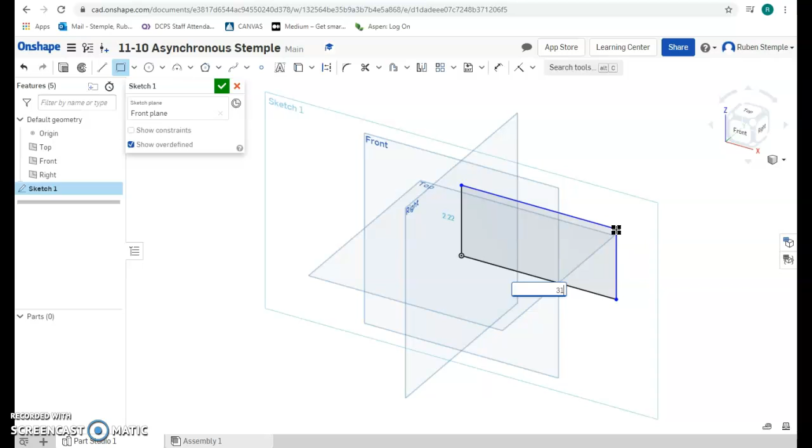I'm going to start that drawing by starting a sketch on the front plane, sketching a rectangle. I'll start it down at the origin, click the button, move up, and make it 3 inches by 1 inch — 3 inches, enter, by 1 inch tall. That was the first section. Click the check mark to stop, and now I have that sketch.

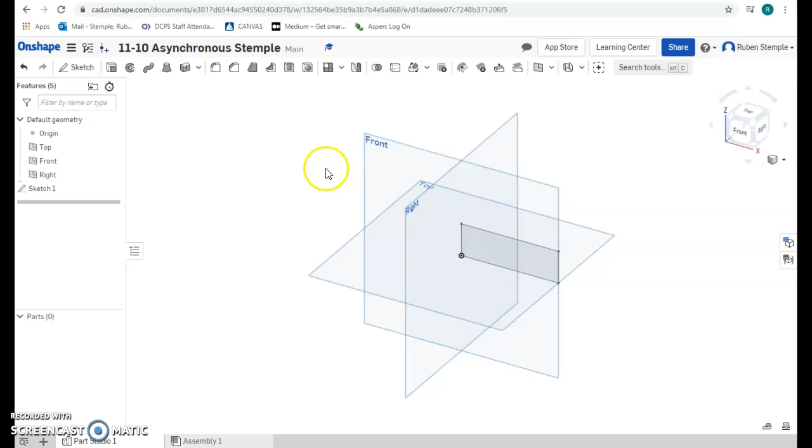I'm going to go back to my presentation to check how deep that should be. The distance back is 1 inch — it looks like a square on this front part, so that's 1 inch back. So I'm going to extrude that by 1 inch. Back to my sketch, click the extrude button, extrude by 1 inch. There we go, now I've got that little square — the first part of my drawing.

Now let's go back to the sketch, because we need to add this little top part here. It's 1.5 inches over and half an inch tall. So I'm going to add that.

I'm going to use an additive process. If you wanted to use a subtractive process, you could have built the whole thing and then subtracted that piece out. It really doesn't make any difference however you decide to do it.

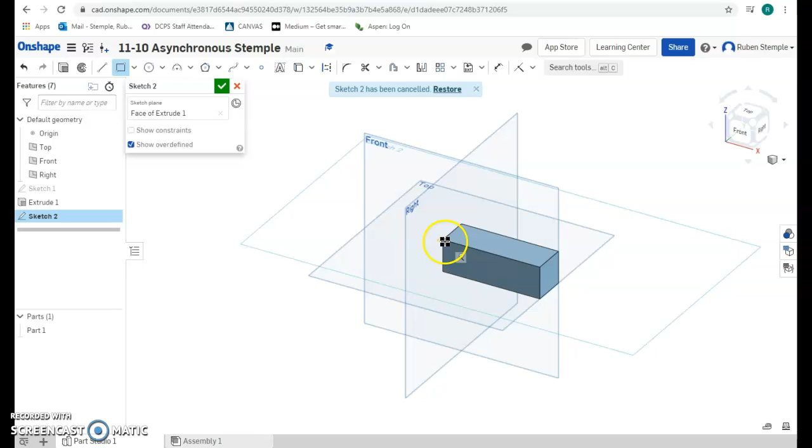So I'm going to do a new sketch right here, and make a rectangle at this corner, to that corner. Something didn't work out — let me try again. So I'll do a sketch on the top section, a rectangle from this corner to this corner, and that should be 1.5 inches. Okay, so that's that sketch.

I'll go back to the diagram and see that part should be a half inch tall. So go right back here — extrude that a half inch tall, 0.5 is a half inch, and there we go. Now I've got most of that block built.

I'll go back to my diagram, and I see there's a hole all the way through the center of it. It looks like it's centered — let me double check. That's a half inch over for the circle, a half inch up for the circle, and the diameter of that circle is a quarter of an inch. So I'm going to build that hole right through the center. Looking at the front view or top view, I see that hole goes all the way through that block, which is 3 inches long.

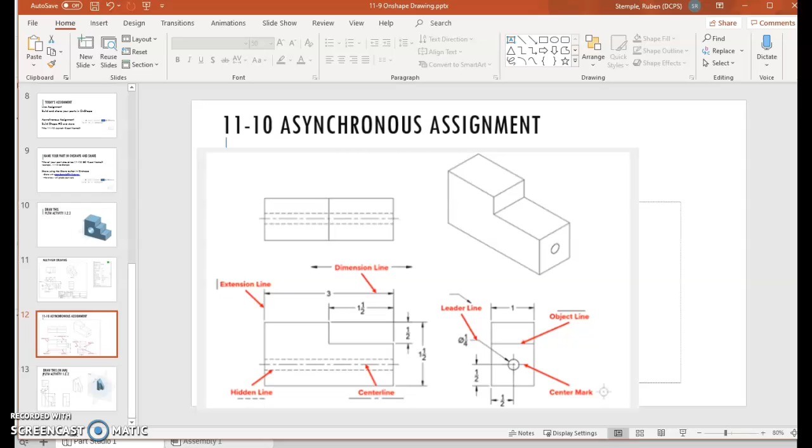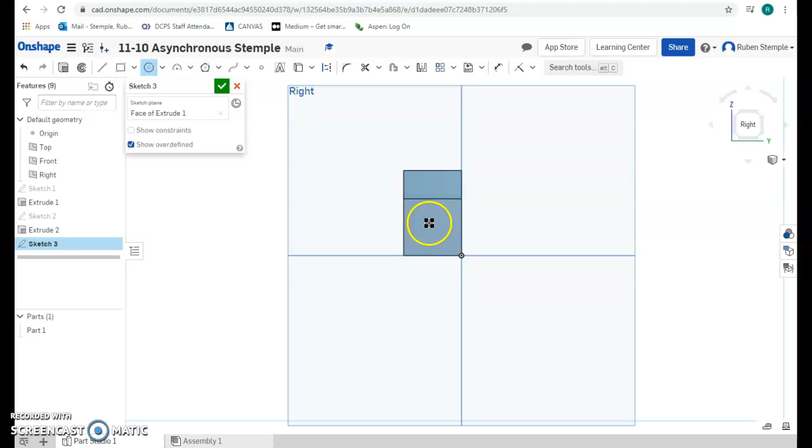So let me go back up to Onshape and start a new sketch, starting here on the front. I'm going to move my diagram around so I can see the right side view. I'll draw a circle right here, anywhere for now, and set its diameter to 0.25 inches because that's what the drawing specified. Now obviously that's not centered — pretty clearly not centered — so I need to constrain it using the dimensioning tool.

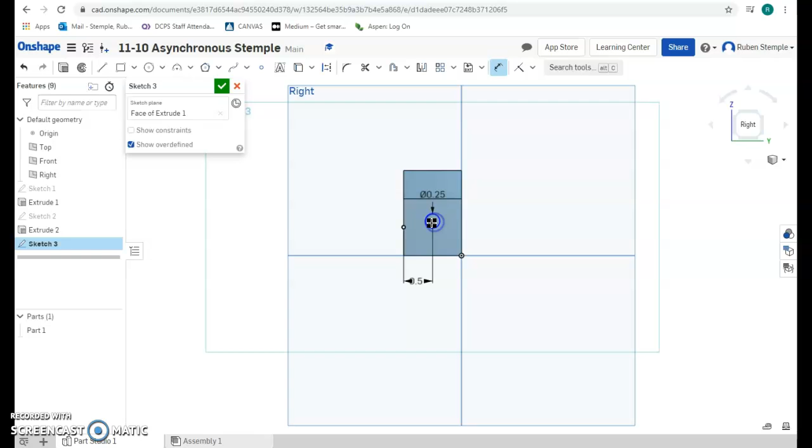I'm going to click the dimensioning tool. Between the center of my circle and this outside edge, that's going to be 0.5. And from the center of my circle to the bottom is also going to be 0.5. Now it's centered both ways, because this whole distance here is an inch.

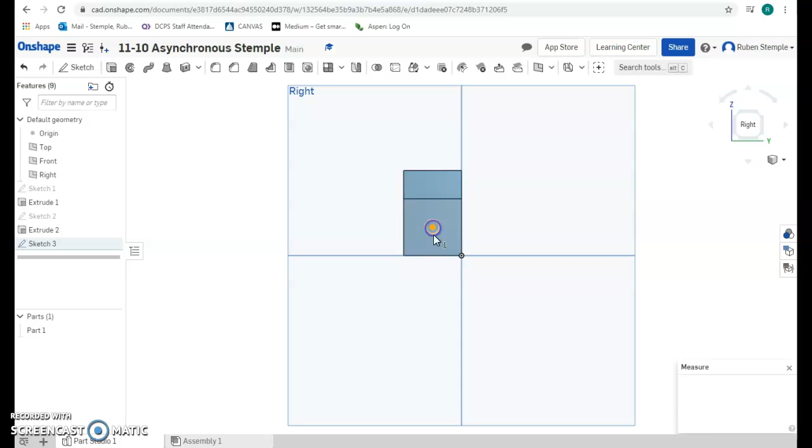Click that. Now if I want to check it, I can click my measurement tool and click here to see that's 1 inch, and click here to see that's 1 inch too. I can click this diameter to see that's 0.25 inches, and click from the center to see that's 0.5 inches. There's a lot I can do with the dimensioning tool here.

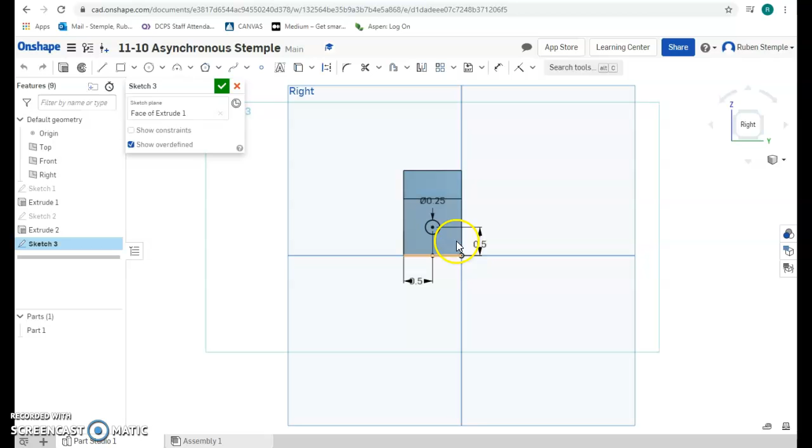Get rid of that, I don't need any of that. Okay, so let's go back to my sketch — that's sketch number 3. Click sketch 3, and I'm going to extrude that all the way through, removing 3 inches of material all the way through. Click that so it's done.

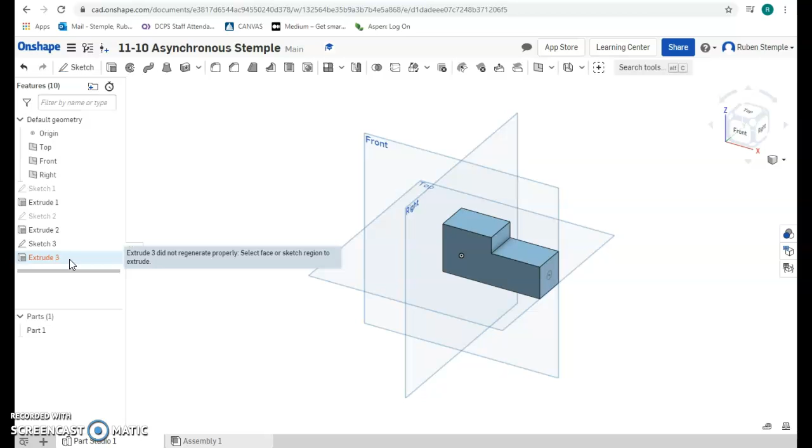Switch back to my trimetric view. Something happened — what happened with my extrude? It says select face, sketch region to extrude. Not sure what happened there, so I'll just delete it. It happens — I still have my sketch, the extrude just didn't work out. I must have clicked something wrong. It's fine, I'll zoom in a bit and click extrude again.

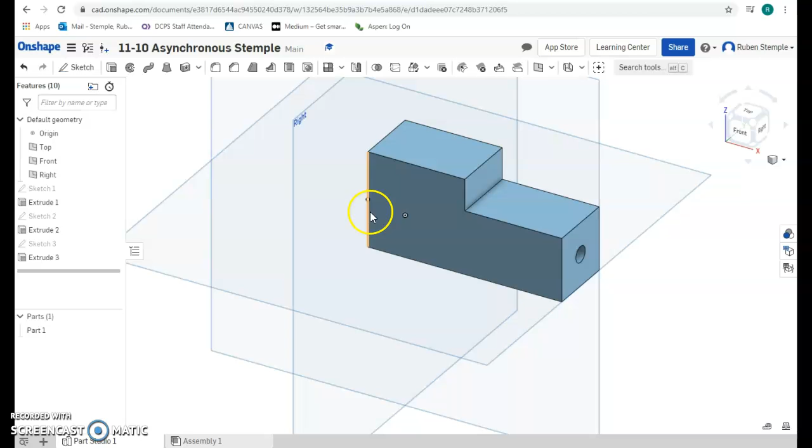I'm going to extrude that face, removing it 3 inches. Boom — now there's a hole that goes all the way through that shape, 3 inches, and I can rotate the shape around to see that hole comes out the back. So now I have the shape that is in the asynchronous assignment.

This is your asynchronous assignment — there it is, there's the title. And of course, then you would share it. Put in my email address here, ruben.stempel@k12.dc.gov, and share that with me. Click the share button there, and that will share it with me so I'll be able to see your asynchronous work for today.